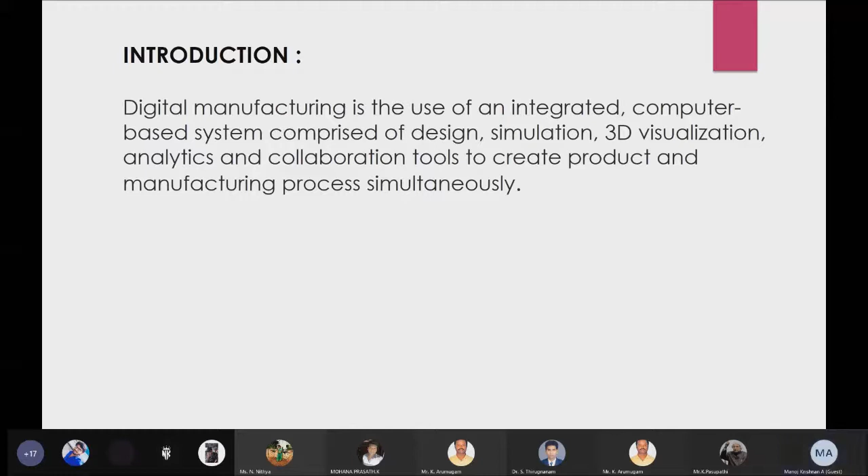The next thing is when we started using electricity for the manufacturing process. With the help of the welding process, instead of using gas welding, we moved to spot welding, which earlier used to be done with the help of manpower.

So the use of electricity is the industrial revolution 2. And the 3rd industrial revolution started when we started using PLC and IT systems. When the computer was integrated with the shop floor, most of the process will be automated.

For example, CNC machine. The CNC machine is nothing but an automated system that can be used for various purposes like part cutting, machining, and everything. So with the help of computer, when we started using it, it is the 3rd industrial revolution.

And the 4th industrial revolution comprises of the 3rd industrial revolution along with cloud computing. It uses cloud technology which collects all the data from the plant. For example, if there is any AGV, an automated guided vehicle in the plant, it collects the data from that. For a brief, I will show you the next slide.

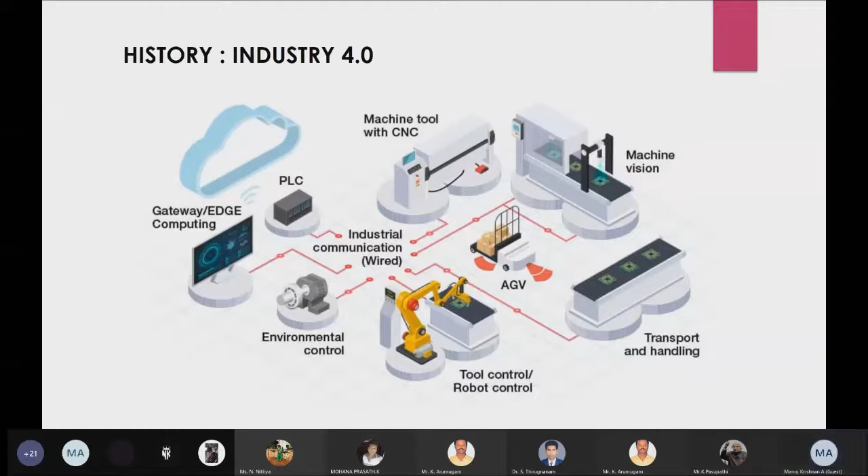Since I work in automotive, I will be explaining briefly about the automotive today. The automotive industry is nothing but a group of organizations which involves in designing, development, manufacturing, marketing, and selling of motor vehicles. The process of the automobile is what is called the end product of the automotive industry. It is one of the largest economic sectors in the world.

So if you take automotive industry in total, it comprises of various supplier companies. For a car to be built, you need to get supplied components from many manufacturers. If you take a car, there are so many components which we need for a car.

For example, we need tires, and we need engine components, we need even a small bolt and nut. Everything will be required because the OEM, which is called original equipment manufacturer - you could find companies like Honda, Toyota. They are called OEMs because they have a product by their name.

OEM cannot produce all the components, so what they will do is they will outsource all the components to the suppliers. Suppliers will be providing all the components to them, not all, but most of the components to them.

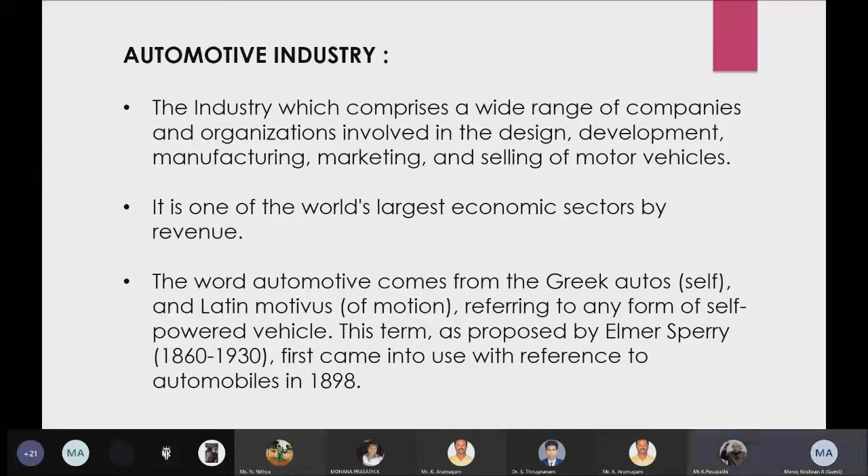Okay, and moving on to the next one. So now, how digital manufacturing is implemented in the automotive industry is, we are using digital manufacturing in various phases of the automotive industry. Here are some of the examples that you can see.

It is used in press shop. Press shop is nothing but, when you look at a car, we could find the door components and everything. Initially it will be a sheet metal, a plain sheet metal. So press shop is nothing but it will have different kinds of dies which stamp the sheet metal to provide a shape to the component.

Then afterwards comes the BIW assembly. Once the child component which we get from the press shop is moved on to the next one, it is used to assemble the BIW. BIW is nothing but body in white. I will tell it briefly in the upcoming slides.

And it is also used in paint shop and general assembly. General assembly is where the car's variant will be fitted.

If you look at cars, there are so many trims, meaning variants. For example, if you take a Swift, the variants are LXI, VXI, and ZXI. In the LXI, only some features are provided, and these feature lists are defined in the general assembly. So during manufacturing, in the assembly section, they define the car's variant and manufacture based on the specific variant.

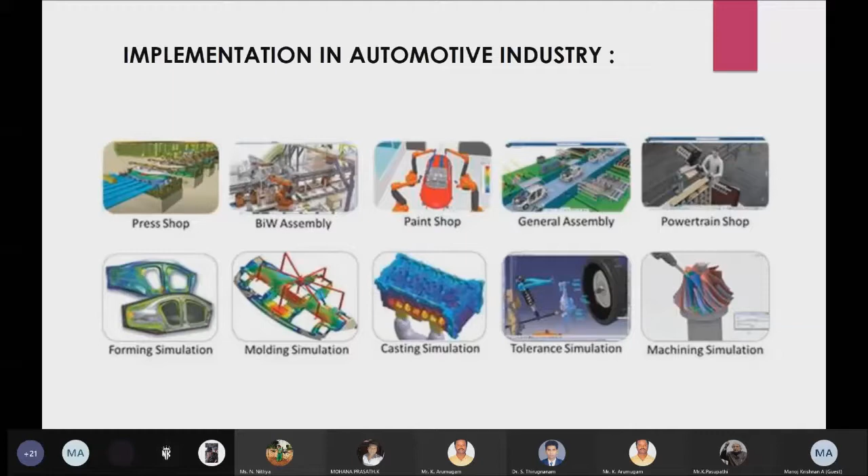Moving on to the next one, for machining simulation also, we are implementing this digital manufacturing. Any questions till now? No, sir. Okay.

I will be covering the topic of BIW assembly today. BIW is nothing but an untreated and unpainted sheet metal part.

Once the stamping simulation is completed, from the sheet metal, the dies will be producing child components. For example, you could find inside a door there are so many components. What you find in the real world is a finished component, but within the door there are child components, some used for latch areas and hinge areas, and there will be impact beams. These components are separately manufactured in the stamping simulation.

In the BIW simulation, we collect all the components together. For example, if you take the door, we get hinge components, latch components, and reinforcement components, everything from the customer end.

What we do is simulate the entire manufacturing line in the software itself. So before delivering it, we find all the issues we are facing and how the layout will be placed. Everything is done in the digital phase itself, which cuts down a lot of rework and a lot of cost.

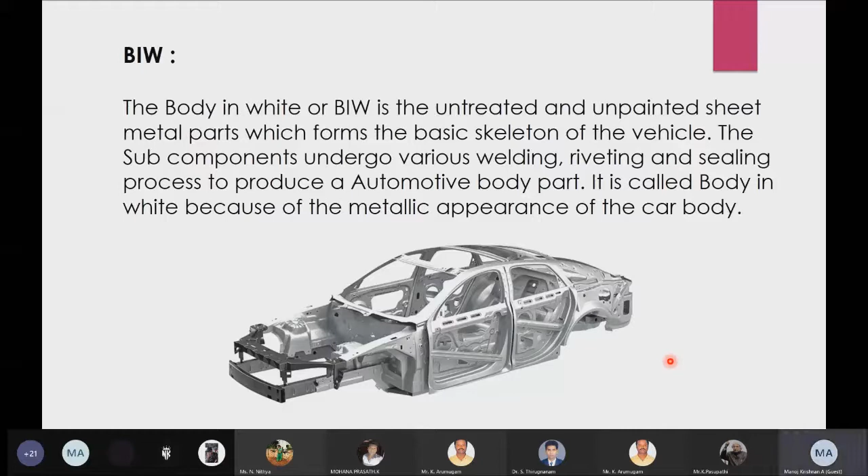These are the BIW components found in a modern day sedan. There are various types of car models, but today I'll focus on a sedan. This is the finished component of the sedan, which includes so many components like hood, door, and everything. These are called closure lines - the things used to contain, which move on the body in white and provide closure. So hood, door, and trunk lid are called closure lines.

Starting from the body, it mainly consists of two components: floor components and body main components. The floor component is divided into three sections. The first is the engine compartment, which holds the engine and comes at the front portion of the car. These components are designed based on crash tests studied by the product team.

Our process is to manufacture these components, and there is a separate team called...

Hello, can you hear me? Yes Manoj, sorry, there was a network break.

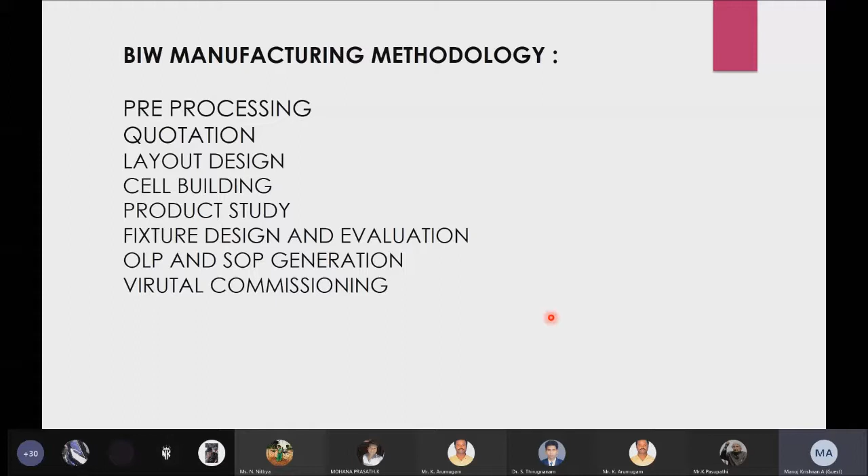So the first phase is pre-processing. Pre-processing is done in the OEM side. For example, if you take OEMs such as Maruti Suzuki, Ford, and everyone, before delivering the product to the customer and to begin the manufacturing phase, what they will do is they will study the component first.

They will study whether the product they are going to manufacture is feasible to manufacture or not. The product team will design a component based on the design. There will be a design team which provides sketches, and based on the sketches, the product team will develop the component, develop the car. Our manufacturing scope is to check whether the design provided by the product team is feasible to manufacture. They may provide some complicated structures, and from our manufacturing scope, we cannot manufacture such components.

So we will be checking everything before the product itself is started, before the stamping phase itself. What we will be doing is we will study the product data which is still in the maturing phase, and we will be working along with the product team, providing feedback to them on whether it is okay for manufacturing or not, and whether we need any changes in the car body itself.

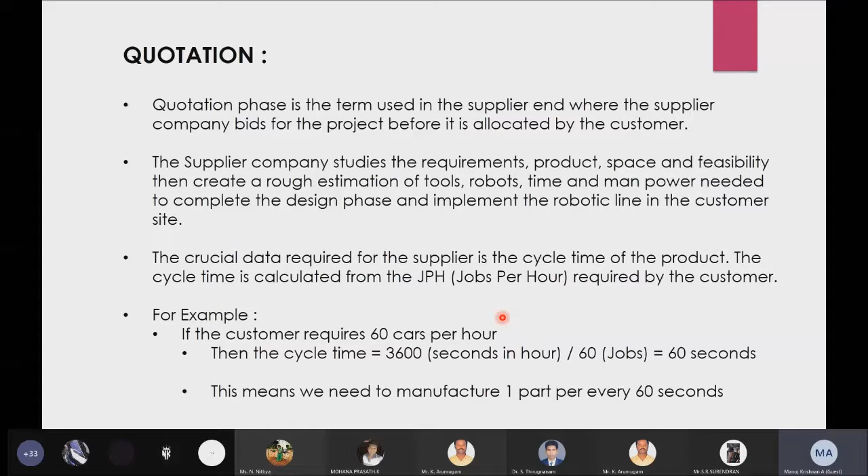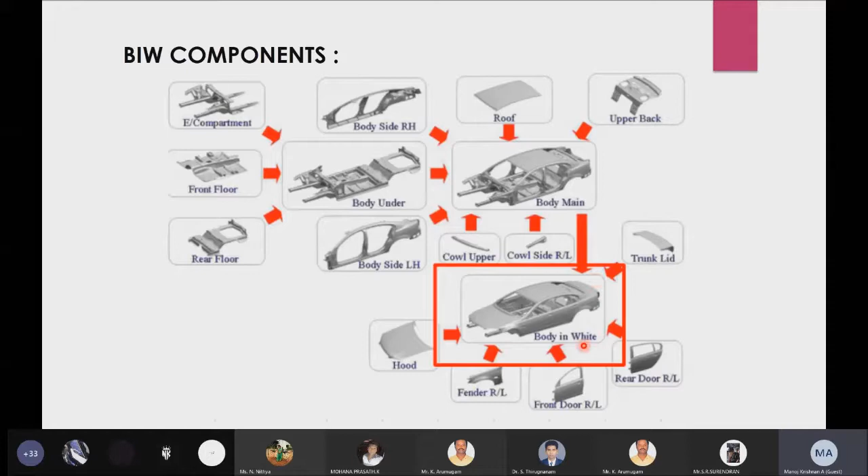If you look at the lines from the previous slide, we will be having each line for each component. For each 60 seconds, one component will be coming from here, one from here, one from the rear floor, and for each 60 seconds, one body under will be manufactured and welded. So for each station, it should achieve 60 seconds, so that when coming to the final stages, for each 60 seconds, one entire car will be coming out of the assembly line. This is what we determine from the quotation phase itself.

Moving on to the next one, we will be receiving the layout from the customer. For layout, in digital manufacturing, they use different kinds of software like AutoCAD, FactoryCAD, iCAD. Previously, they used to chart everything on A3 or other sheets, but now since we have moved to digital phases, they use 2D software.

The supplier end will go directly to the customer side and mark the space provided by the customer for the manufacturing line, and based on that they will provide a rough sketch. They will come to the company and discuss with the pre-processing team, and all the design and simulation teams will discuss, and based on that they create a rough sketch of how the layout will look. Based on the processes, everything will be selected, and they will present it to the customer during the quotation phase itself. The draft layout, once okayed by the customer based on the process, will be provided to the simulation end also.

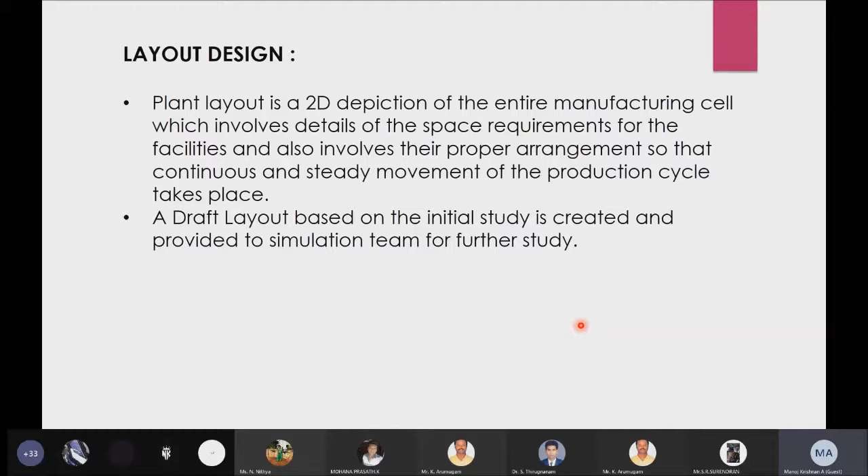The layout is mainly needed during the implementation phase. Once all the digital phase is over, we will provide it to the plant team, and the plant team will mark everything in the plant, and based on it they will place the robots, fixtures, and everything. The software used mainly for layout design is FactoryCAD, iCAD, AutoCAD, but majorly they will use AutoCAD for these kinds of operations.

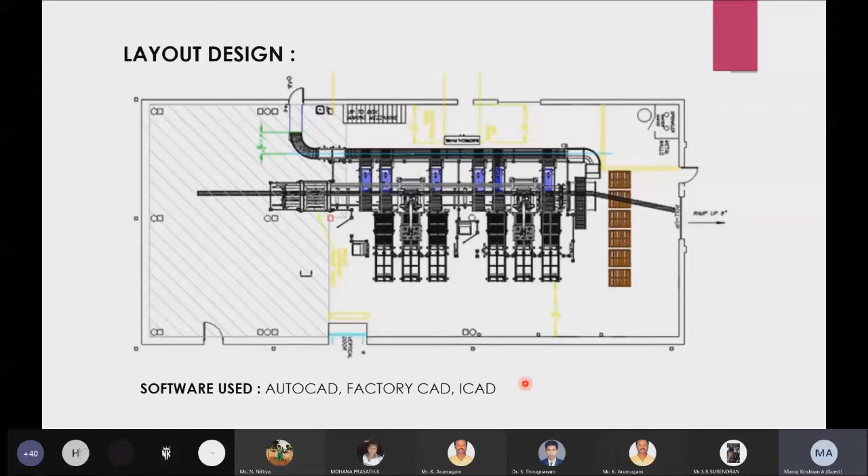So the next phase will be cell building. Since I will be talking mainly about simulation, I will start telling about cell building, because simulation works in tandem with all teams.

This will work along with the die team. The die team is used in the closure lines to manufacture the pressings and everything, and it works along with the layout team and the design team also. So the simulation team works based on the output of each team. The fixture output which we receive from the fixture team is the input for the simulation, and the layout is the input, and so on.

So the cell building is a phase which uses simulation software. We use various kinds of software like Process Simulate, RobCAD, Delmia. These are called simulation softwares, and in them we'll be using various components like layout, robots, guns - if you are going for welding, we call that a welding gun, or if you are going for sealing process, it is called a sealer gun.

And after that, grippers. A gripper is a component used to move a part from one station to the other station. So the robot, with the help of grippers, will hold the component and move it from one station to another.

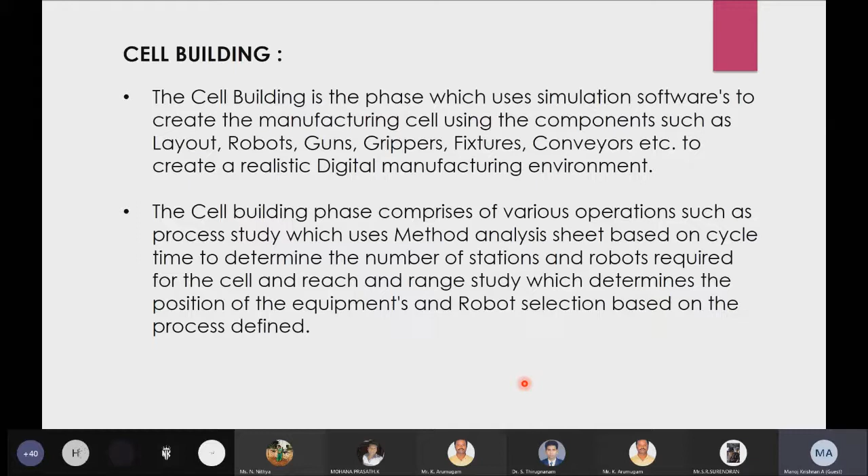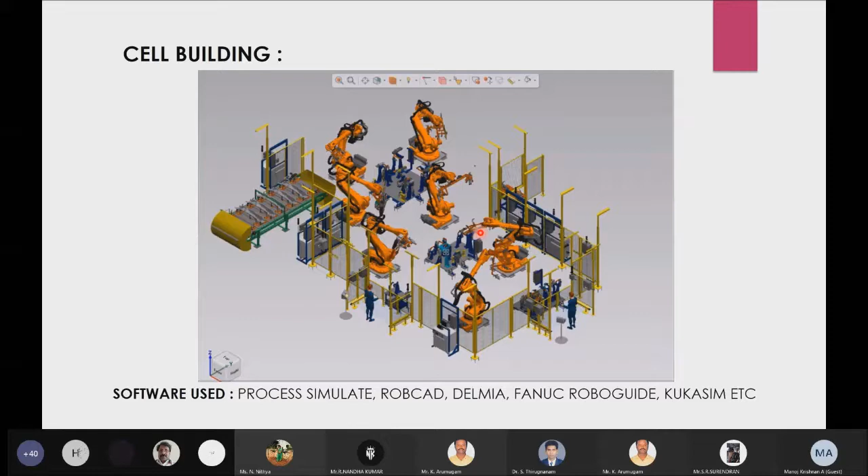So this is also one more image for your reference. So you could find here we have two loading stations, and after that a robot will be picking it from here, and it does operations here, and this robot has a gripper here. So this robot either drops here, and after the finished component is done, it picks the part and drops it here. And here we have one more robot which does the welding operation.

So you could find this is how we will recreate everything. This cell building needs inputs from all the teams. We will be using Process Simulate and RobCAD softwares, and to do this we will get a rough draft from the layout team, and based on the rough draft we will push everything, and based on our reach and range study, we will be altering the layout.

Once after altering, we will provide the data back to the layout team, and the layout team will provide us the final layout. You could find the cable tray, like you could see there is a black component running at the bottom of the cell, right? This is called a cable tray. These things will be determined by the layout team, and you could find these are called fixtures.

So when the operator is loading here, the component should not fall from the environment. So the thing which is used to hold the components in place during the operations or its movement is called a fixture. You could find this is also a fixture. So these are some of the reference images you could find.

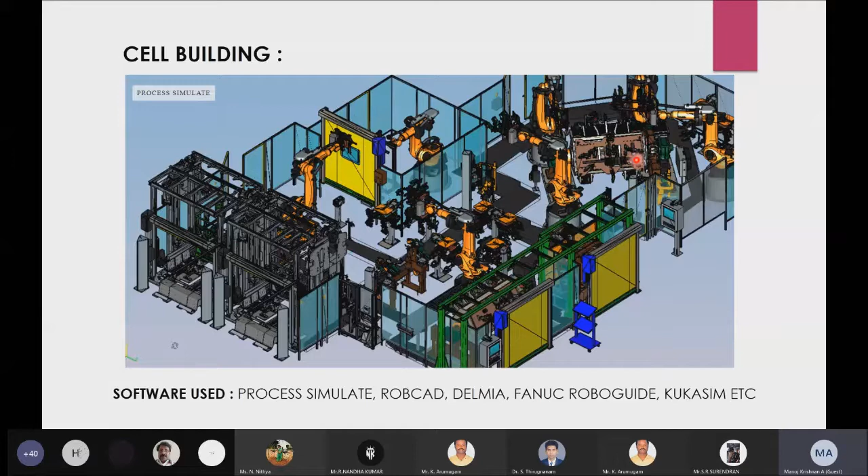So next we will be moving on to the product study. Once the initial reach and range study is completed, we will study the product of the component. We will be receiving the product from the customer end. So what we will do is we will study the component from the child component end itself, and study the step-by-step process of how the component should be made.

For example, in case of a door, initially we will be getting latch, hinge, reinforcement components and everything. So what we do in digital manufacturing is we study the entire component and how many spots it needs to be welded, and we select the guns based on it, because each car will have a different shape, and based on it we need to modify all the guns and everything, and we select all the spots based on the cycle time.

So as I said before, the manufacturing line mainly depends on the cycle time. So for each 60 seconds, some components need to be manufactured. Means we will be calculating how many spots can be welded for one cycle. So if the spots are exceeding that cycle, we will be adding one more station to complete the spot count.

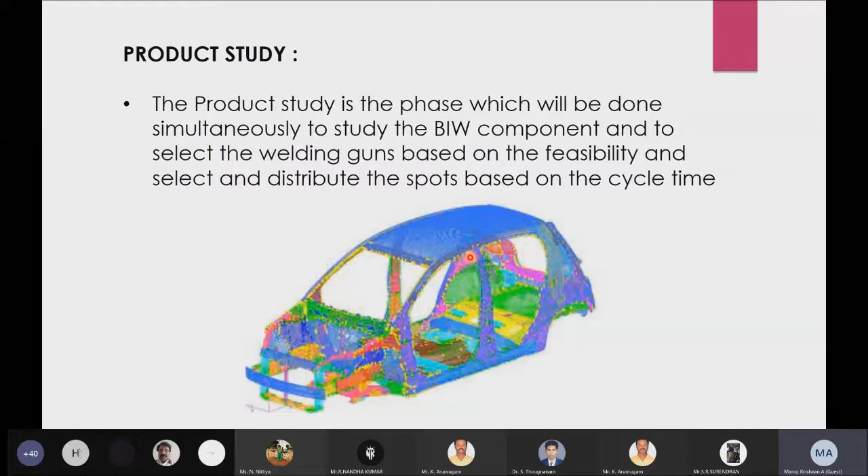So what we will be doing is, in the first station, only these two components will be welded, and once after these two components are welded, it will be moving to the second station, and in the second station only we will be adding the impact beams. So this is the process study which we will be doing in the initial phases.

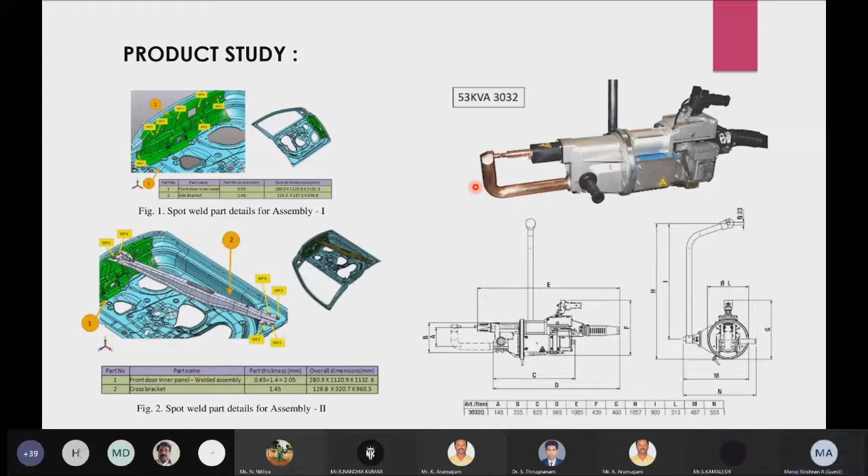So as you can see, there is a child component here, and we will be placing all the guns in the component. The main thing we will consider is that the gun body should not hit the component during the manufacturing phases.

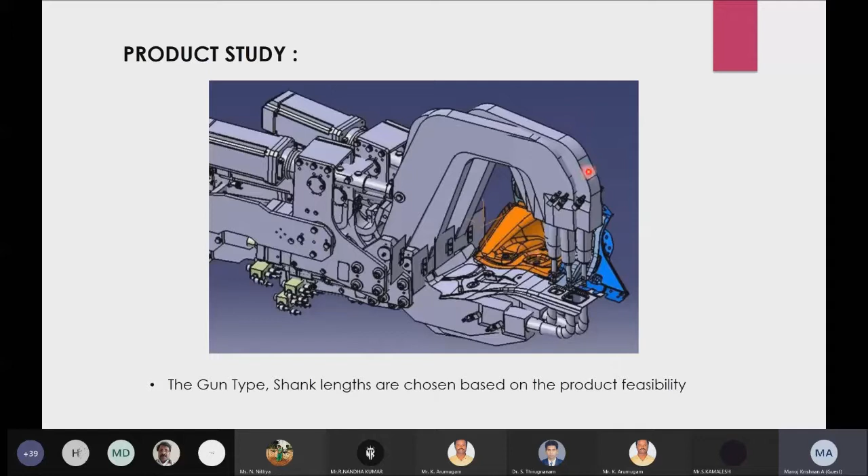Moving on to the next one, this is how the simulation will look like. So this is how the gun study will look like.

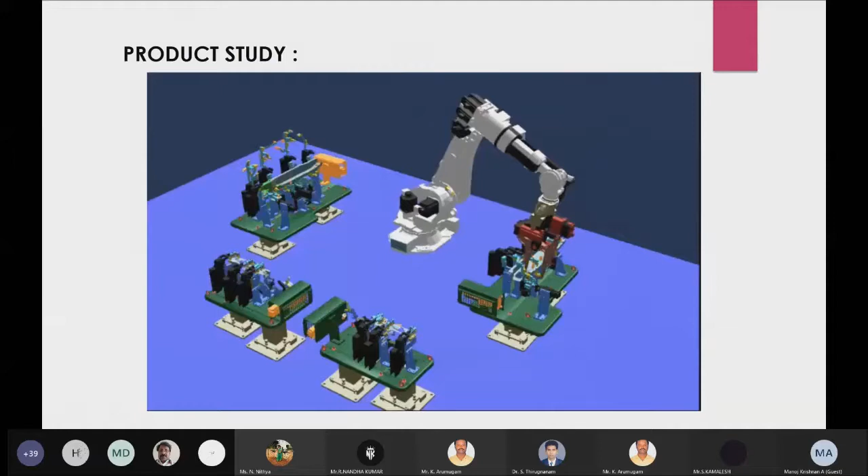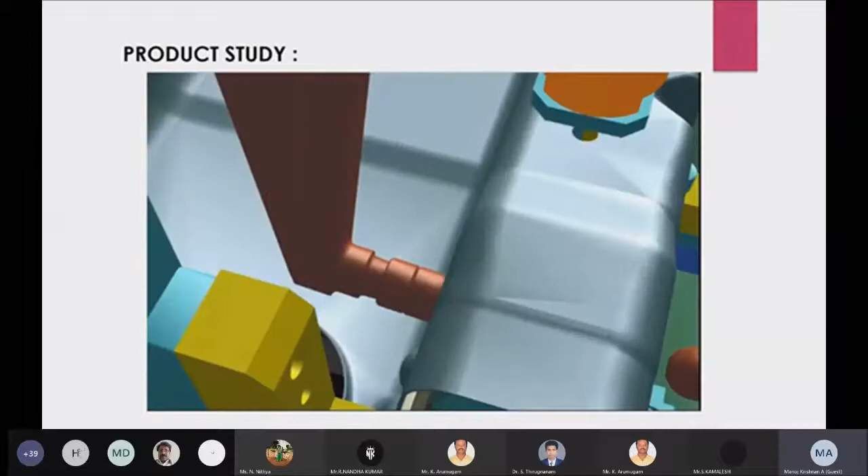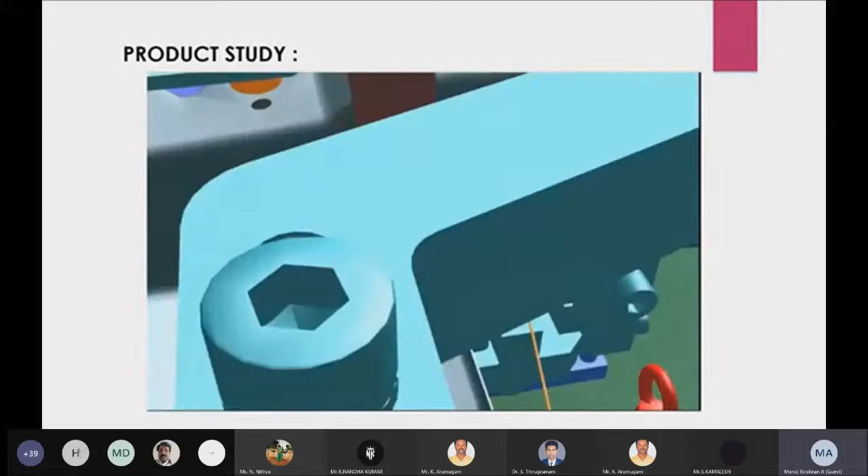So here you can see we are having a gun and a robot, and here we will be checking whether the gun is feasible or not. We'll be checking whether the gun is feasible with the component, or whether it is colliding with the component or with the fixtures. Based on this, the gun selection will be done. So this is how the product study will be done in the simulation phase itself.

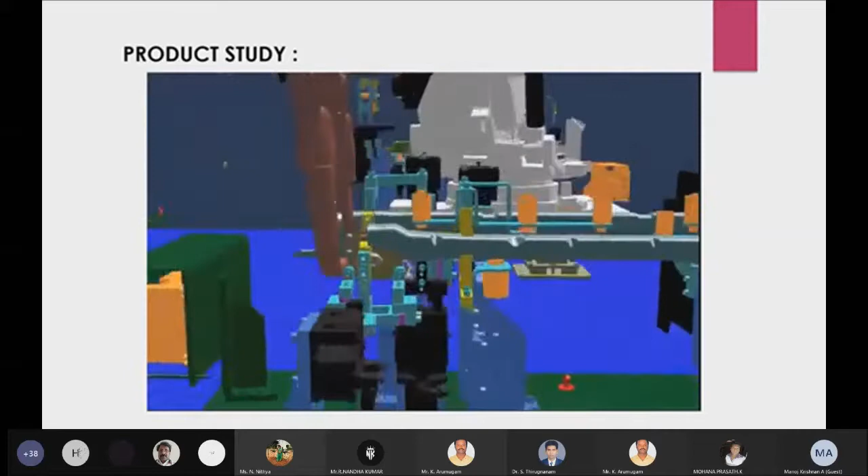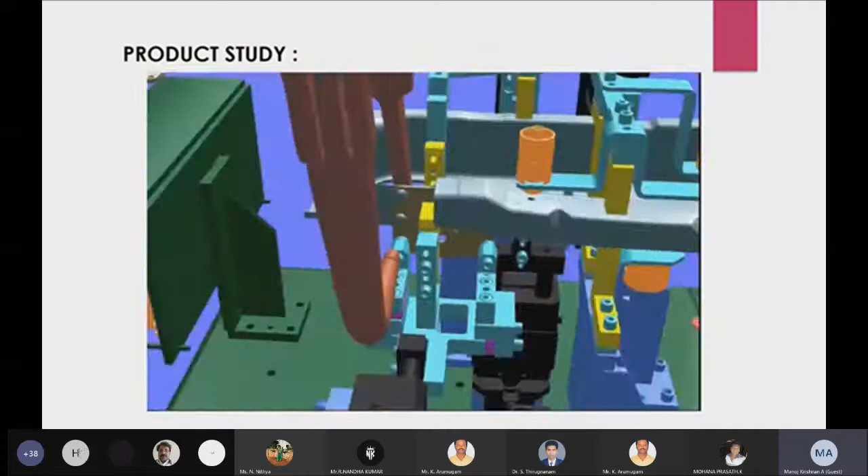We will be checking for all the clearances of the gun and everything in the design phase, so that before ordering the gun, we will have clear information on whether the gun will suit our process or our product. So this is how the product study will be done.

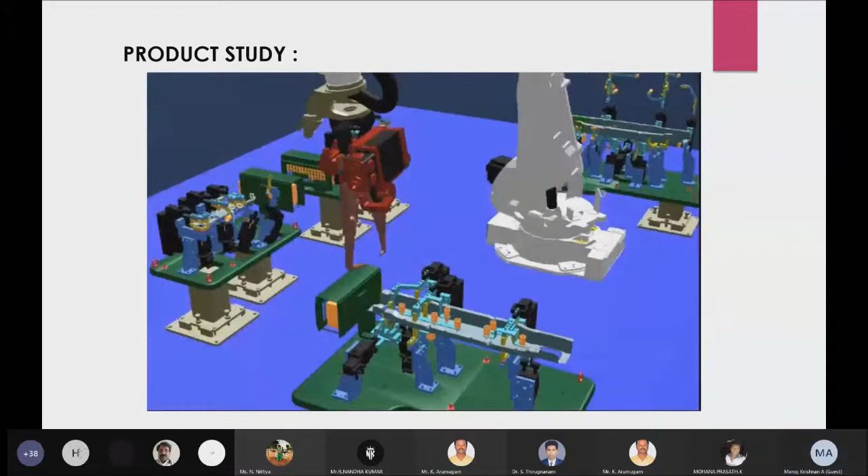Moving on to the next phase, this is the fixture design. As I told you before, we will be collaboratively working with the fixture and the layout team. In the fixture team, you could see the fixture is nothing but a support or holding device which holds the part during its operation.

As you have seen before, during the welding operations, the component was being held by one unit that is called a fixture. The fixture is used in both manual and automatic processes.

As I said before, it is used to hold the child components or finished components, and it will arrest them geometrically, so it will not allow the component to move in the X, Y, or Z direction. It will arrest in all three axes, with the help of pins, clamps, locators, and everything.

In the simulation phase, we will get the input from the fixture team, and we will be checking for the gun approach, as you have seen before, to provide easy access for the robots to access the spots, which helps in reducing the cycle time, and to check for any collisions during the movement between the gun and fixtures. We will be evaluating everything in the digital phase itself.

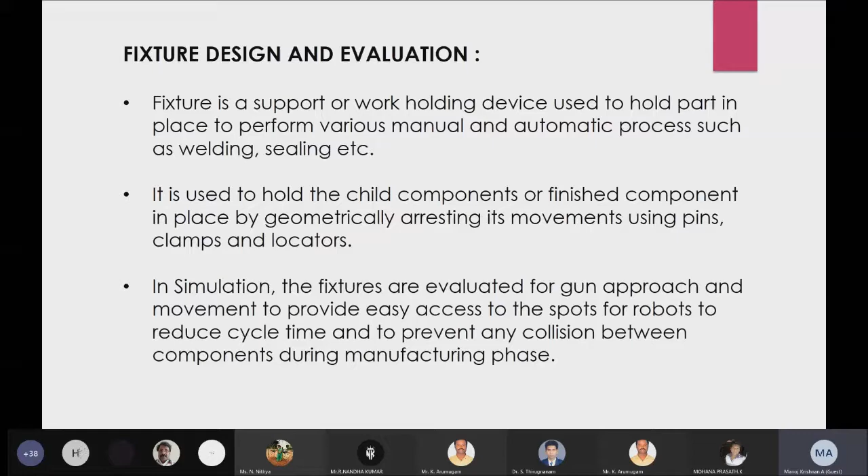There are majorly three types of fixtures we'll be using. One is geo fixtures. Geo fixtures are where all the child components are not welded. Previously, most geo fixtures were operator loaded ones.

The other type of fixture is called pallets. A pallet is mainly used in conveyors, so it doesn't have any clamps or moving parts. A pallet is nothing but a fixed component which allows the movement of the part in the line.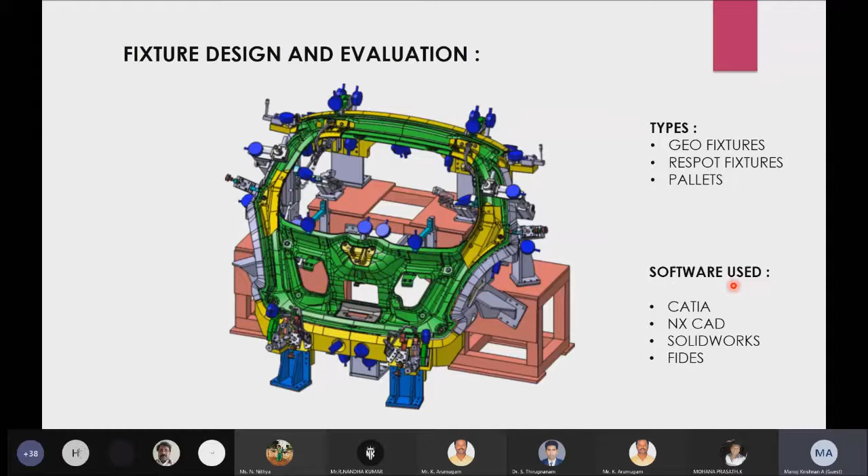Once after the fixture evaluation, layout, and design is done, we will create offline programming for the robots. We will simulate the entire manufacturing process, in which the robot moves to the fixture, starts the operations, and comes out. After that, the clamps open, and another robot will pick and drop the part in the process. So we simulate everything in the digital phase itself.

While doing this, we have to provide programs to the robot. These programs are simulations for the robots. We have various suppliers for the robots, manufactured by companies such as Fanuc, Kawasaki, ABB, KUKA. These are the robot manufacturers, and every manufacturer provides a data file.

We simulate everything in the design phase itself, and with the help of those robot manufacturers, we download the programs. Those downloaded programs are used in manufacturing and provided to the line once implemented. After implementing everything, we provide the program to them, they plug it into the robot, and they recreate the simulation we did in the digital phase in the real-time phase. That is called offline programming.

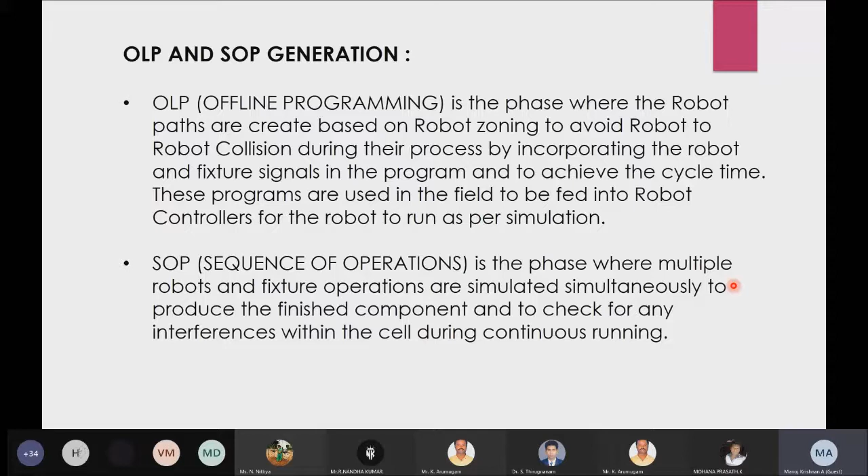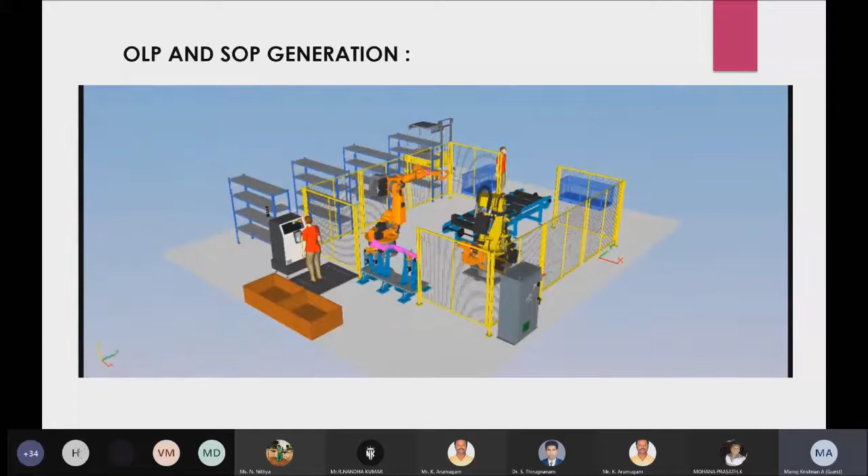This is a demo of how the sequence is done. As you can see, there's also a human simulation. The human is simulated to pick and drop the part, loading the component at the geo station. Then he goes to the PLC and presses the palm button. This is what you call the clamps, the orange component that closes the part, done before welding begins.

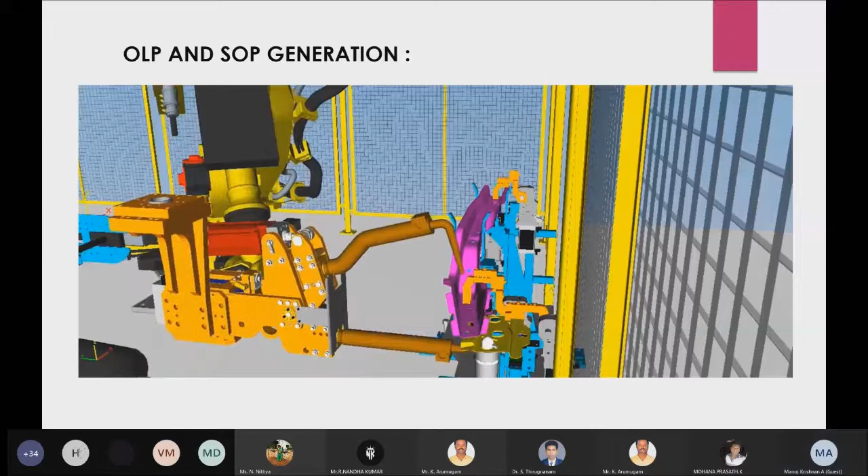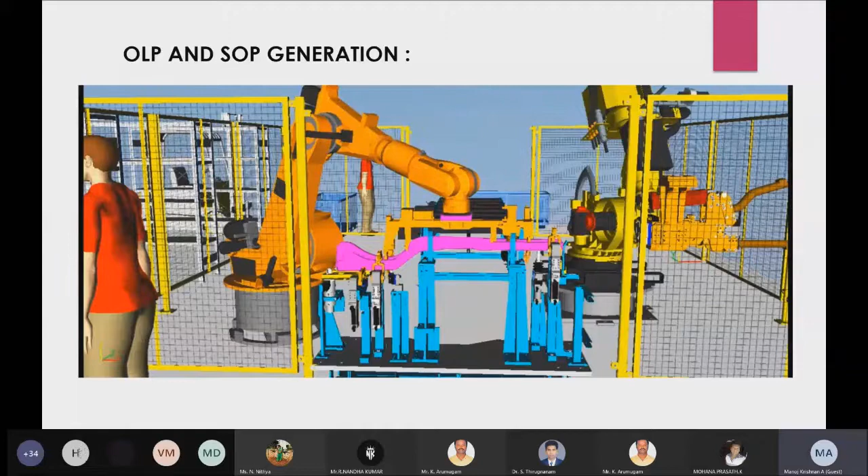After that, the robot moves to welding and performs the welding operation. This is called the gripper component, and you can see there are clamps in the gripper. It picks the clamped part and the fixture clamps open, then drops it onto the conveyor. Once the finished component is done, the operator picks the part and places it on the part stand.

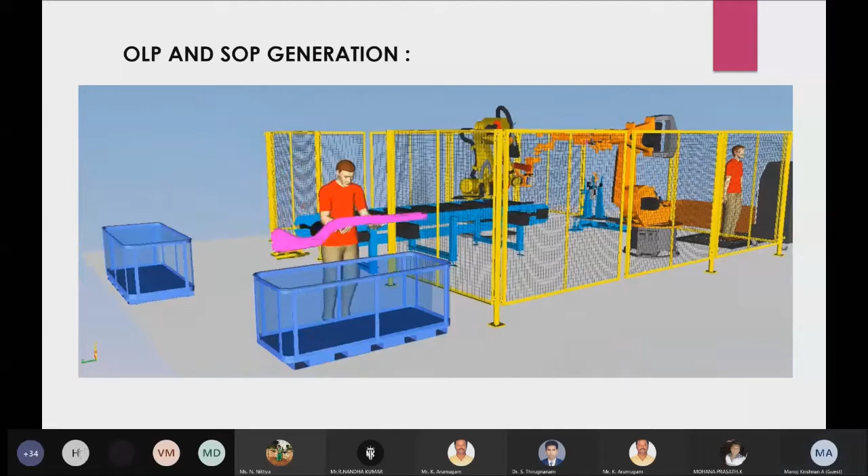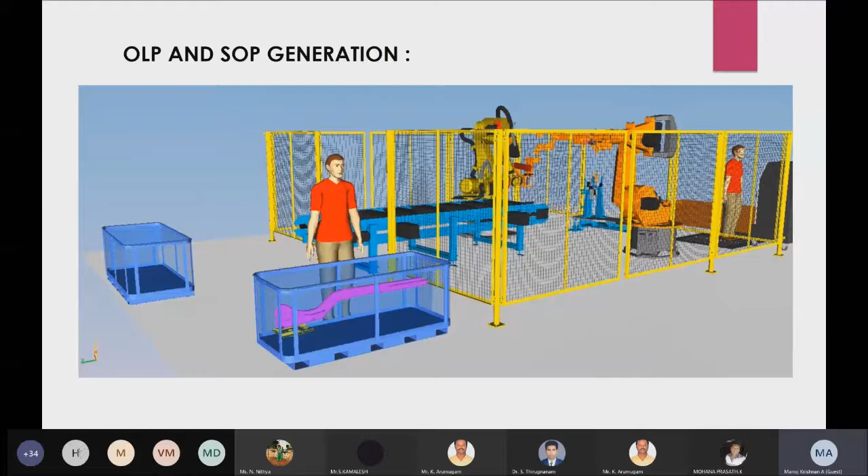The robot movement is done using OLP, and all the other human operations and conveyor movement are done using the SOP. This is what we do in the simulation during the digital manufacturing phase, recreating the entire manufacturing process to avoid issues. This way, we can confirm these robots will not collide, and determine how much time the operator takes to complete the process. All these phases are done in the digital phase itself.

Then this is the new phase we are undergoing, the new innovation we are working on, called virtual commissioning. As you've seen before, we simulated the operator movement, like pressing the palm button and everything.

Virtual commissioning is nothing but once the simulation phase is done, we will be implementing in the plant condition. We will be placing all the components in the floor. Then after that, what we will do is we will communicate with the PLC.

PLC is nothing but a programmable logic controller which uses ladder logic and other logics to determine the process. For example, if the operator fails to load the component, the robot should not come and pick the component, because it uses various sensors to determine whether the component is present in the fixture or not. And once the welding is being done, we will be having sensors to determine whether all the welding is completed or not. So all this information will be handled in the plant condition.

So currently the innovation going on is we are using various 3D technologies to simulate the entire manufacturing plant from the debugging stage itself. The phase which comes after the implementation is called debugging. So we will be providing the robot programs and everything.

In the digital phase, in the plant phase, what they will do is communicate the robot with the PLC. They will be receiving the signals from the robot and checking whether the signal is okay, and after that they will push to the next step. So all these things will be done in the virtual commissioning phase itself, where we will be implementing all the PLC logics and the HMI.

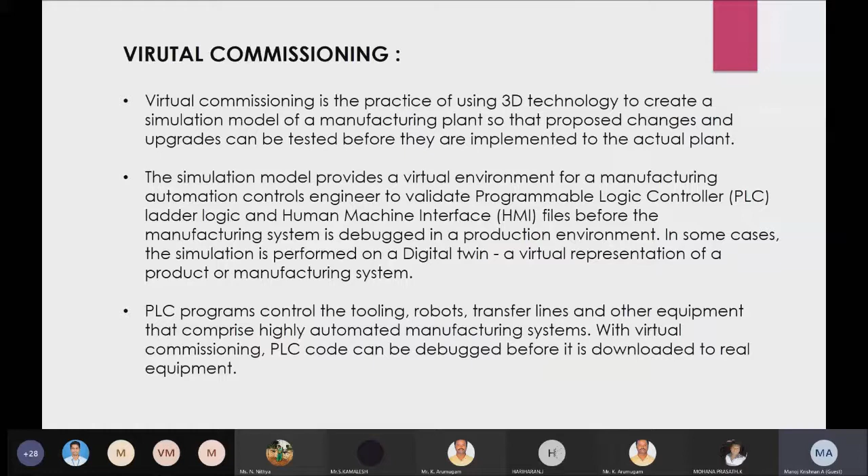So now we are trying to recreate everything in the virtual commissioning. This is what the current innovation is going towards. And this is a sample of how this PLC is working.

You could find here the robot is at home. This is what a sample HMI box will look like. You could find the robot is at home condition, and here you can see the light sensors.

There will be various light sensors which will be placed, and when the part approaches the endpoint, we will receive a signal indicating the part has approached. Then the robot will be moving, doing the welding operations, and it will be placed in the next conveyor.

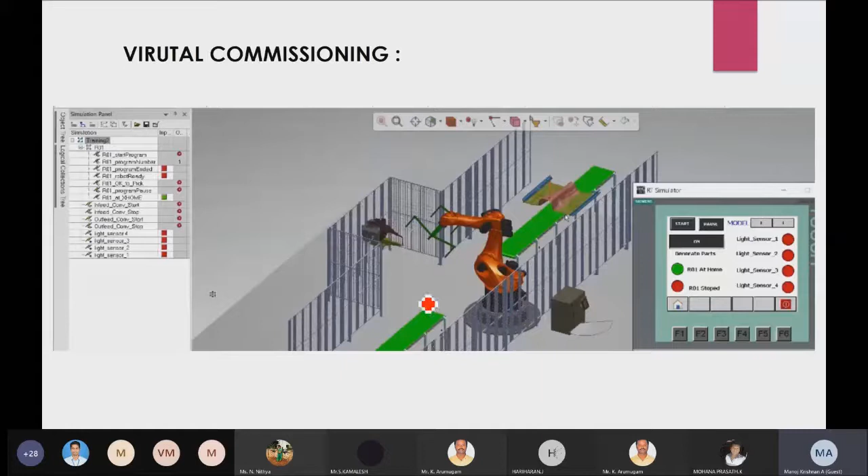You could find in the HMI box, for each step, how the process will be displayed. Once reaching, you could find the light sensor is enabled, which shows the part is present in that position, and the robot-at-home indicator is turned off.

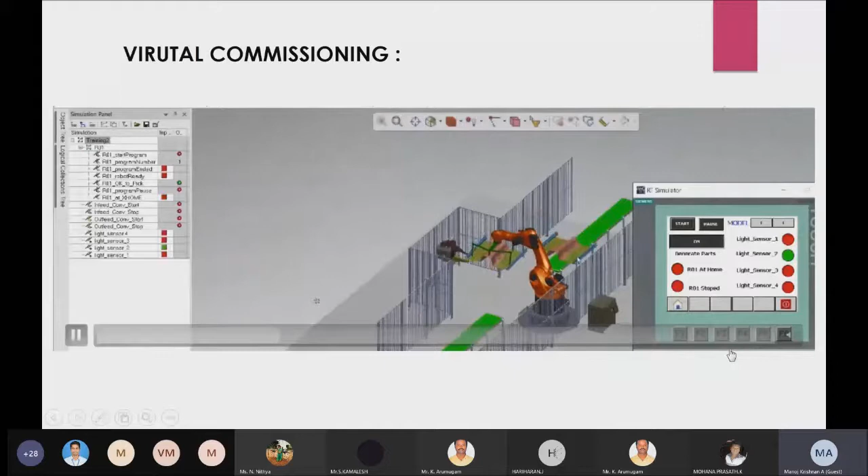Now during the welding operation, the next component arrived. This light sensor checks for the part presence and provides the operator information that a part has arrived at this location. All this information will be shown in the HMI box.

So the operator can control the entire cell using this HMI box. He can start the operation, pause the operation, and turn the entire cell on and off using this HMI box. So everything will be done here itself.

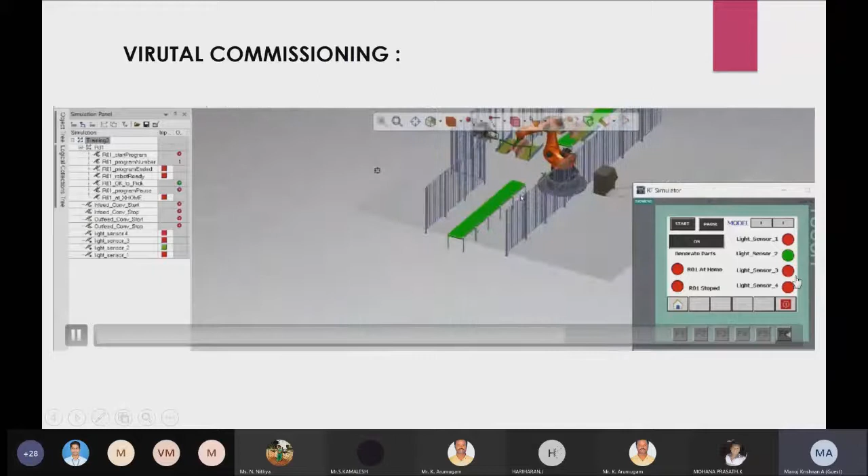So after dropping, you could find another light sensor being turned on. Once it moves to the other position, you can see the operator turning off the cell. But since the operation already started, it will keep running. So what we can do is pause the cell to stop the robot. And while stopping, you could find the robot-stopped signal is also turned on. So this is what virtual commissioning will look like.

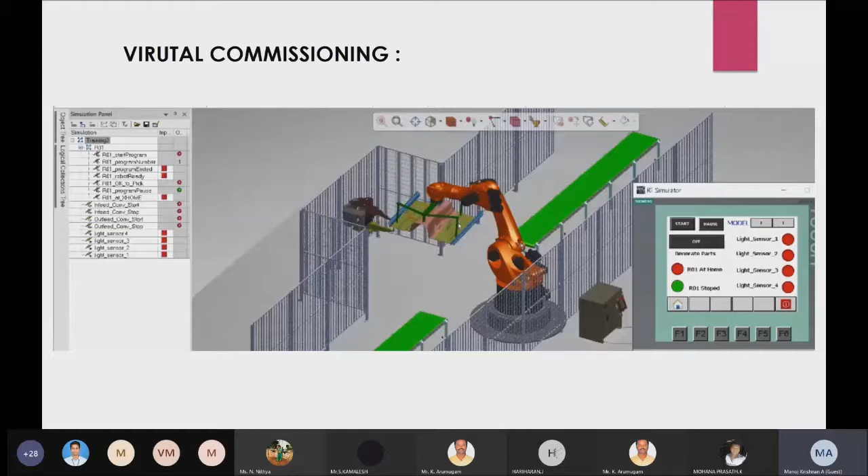We'll be controlling all the operations in the digital phase itself before implementing, so even debugging can be done. On the left, you could find the signals chart, showing what signals we are receiving here. So everything will be done here.

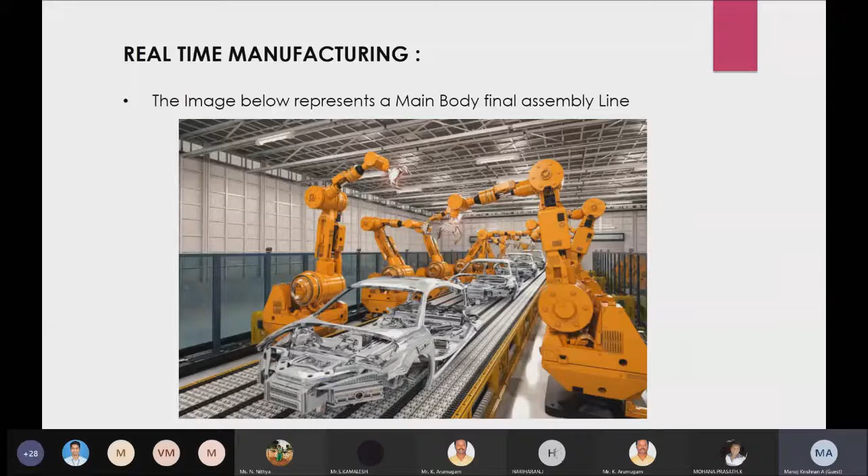So this is what a real-time manufacturing cell will look like after the simulation phase. Once the layout, fixture, and everything is deployed to the plant team, they will be assembling all the robots and cars. Here the picture represents the main body line, in which the car's main body will be moving in a shuttle, and we'll be having numerous robots to do the welding operations and everything.

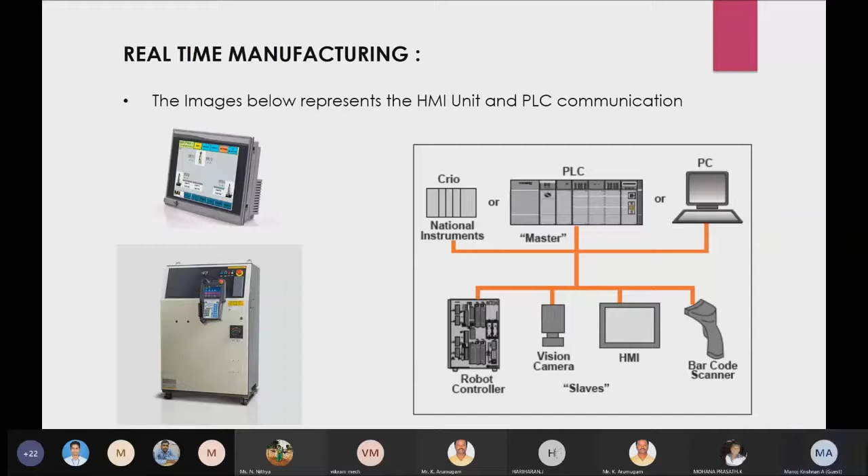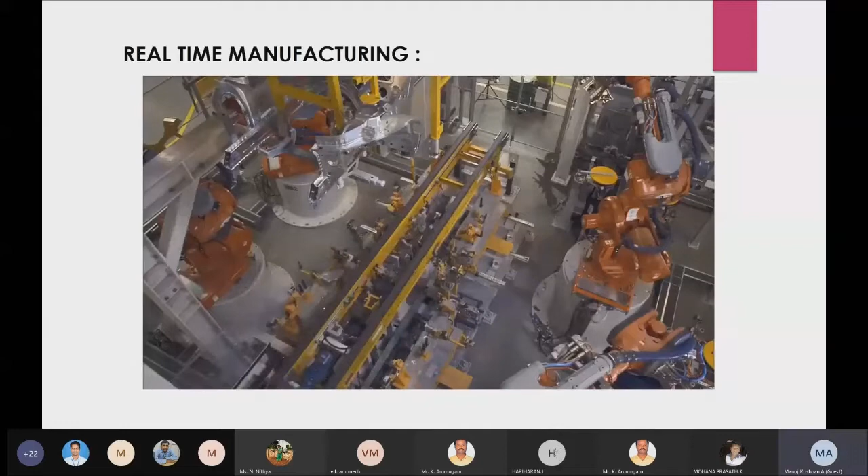So this is an example of how the real-time manufacturing I explained will look like. You can see this is the underbody line, and this is how a shuttle in the plant will look like. This is a gripper robot picking the underbody of the car and moving the part along.

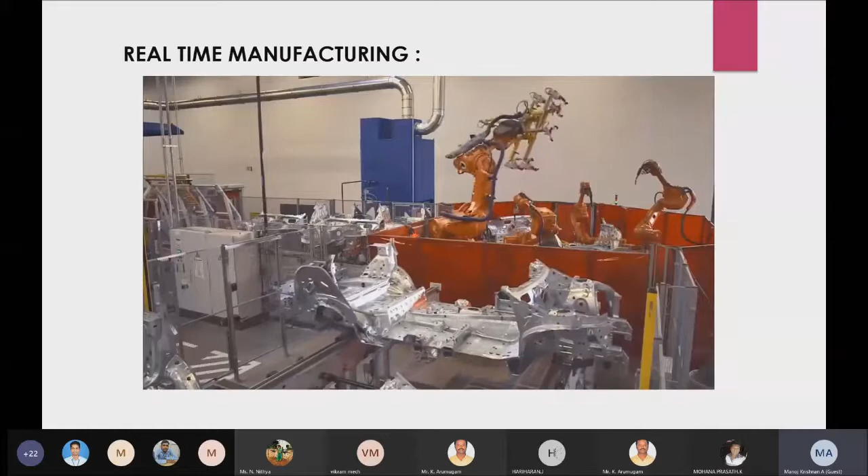So what we'll be doing in the digital phase is simulating everything there to avoid rework. You could find the robot cost and fixture cost, everything. The cost of rework is so high in the manufacturing sector, so digital manufacturing plays a key role in reducing all these costs.

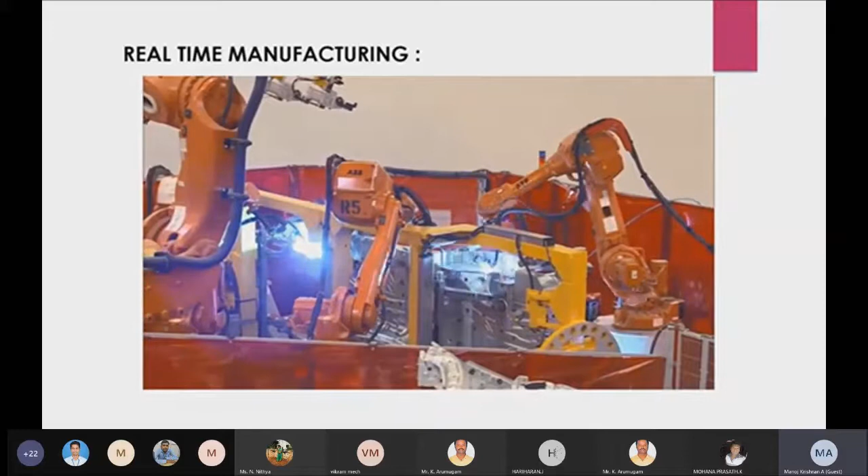So here they are doing the arc welding process.

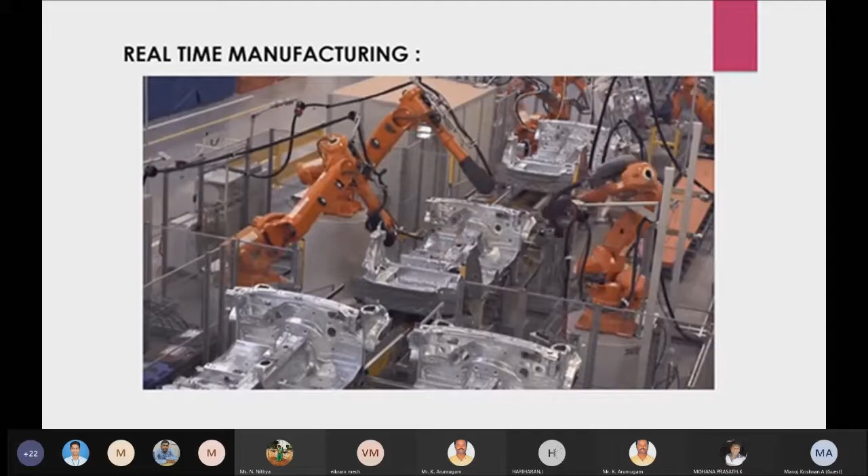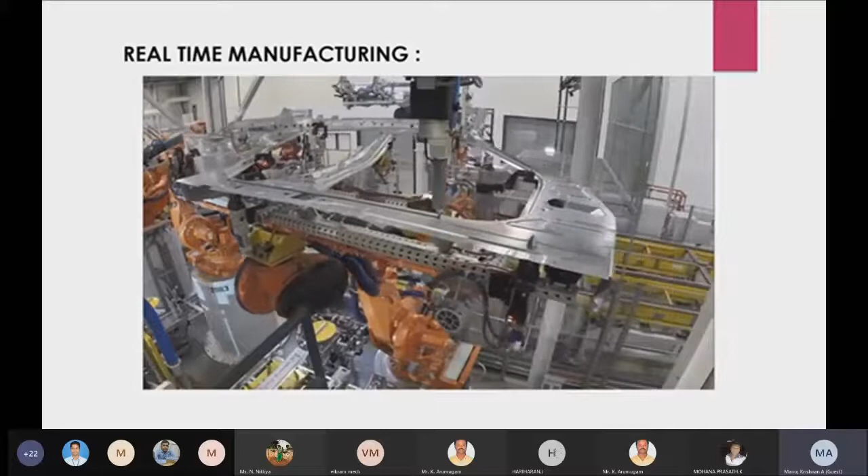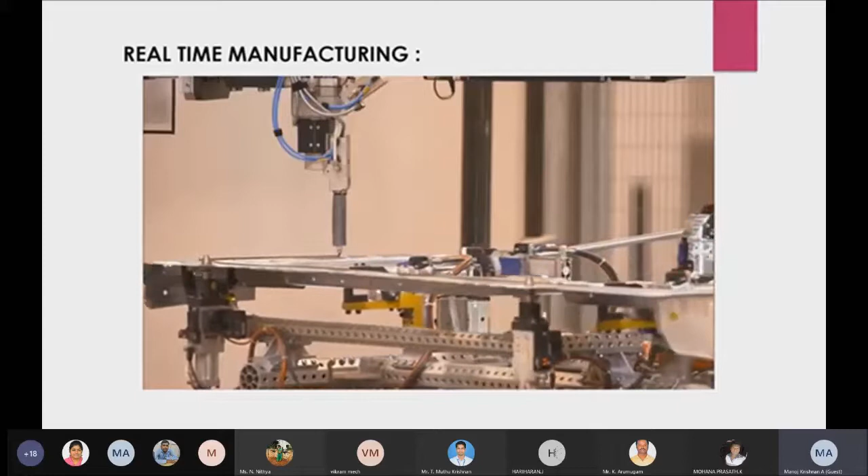So this is what I mentioned about the sealing process. You could find a robot applying glue to the body side. What it will do is merge the body side to the underbody, so it should have a strong adhesive to the underbody. After sealing, the side body will come and marry with the underbody. It provides a strong adhesive to that, and also provides dampening, giving a cushion to reduce vibrations and everything.

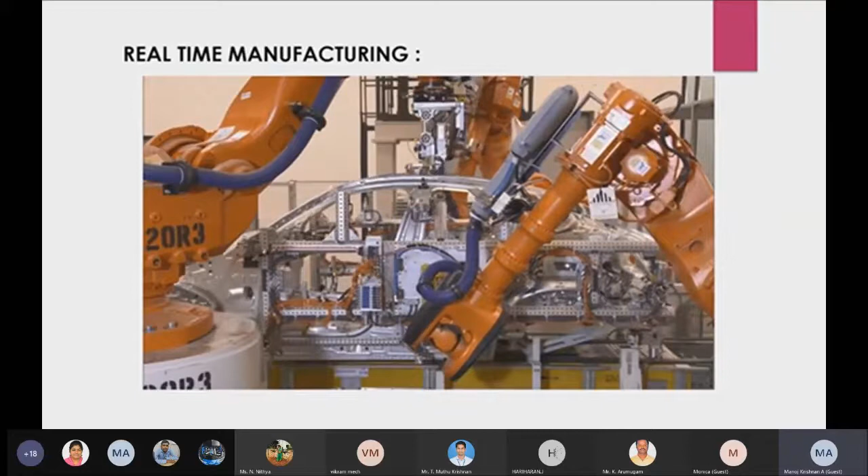After the side body, you could find the roof reinforcements are placed, and after that the welding is done for the body main.

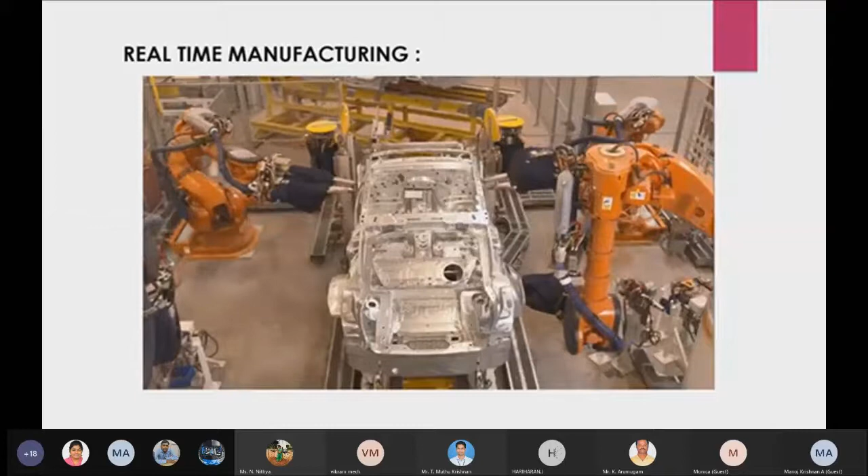So this is how spot welding will look like. We'll be having different guns, and then it will do the welding.

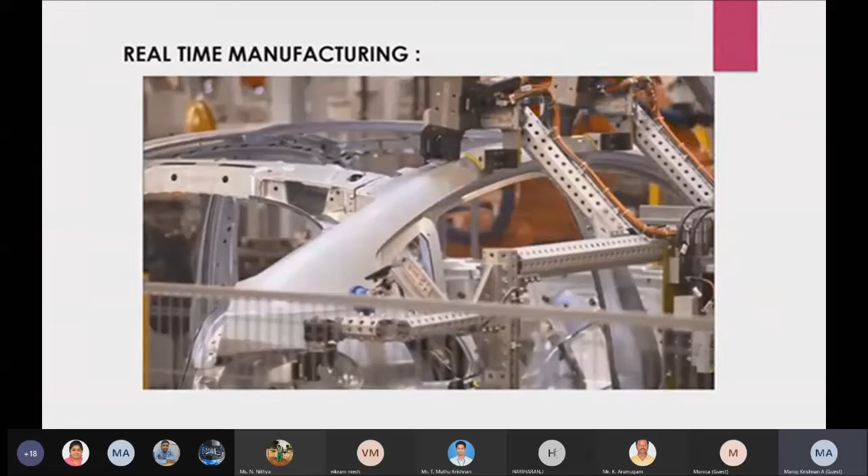So as you can see, this is how the grippers will actually work. After placing it here, the clamps open. Everything will be automated in the automotive field, and these sequences are provided by the PLC controller. Once reaching here, the robot will send a signal to the PLC that it has reached, and the PLC will send a signal to the grippers to open the clamp. So that is what a PLC does.

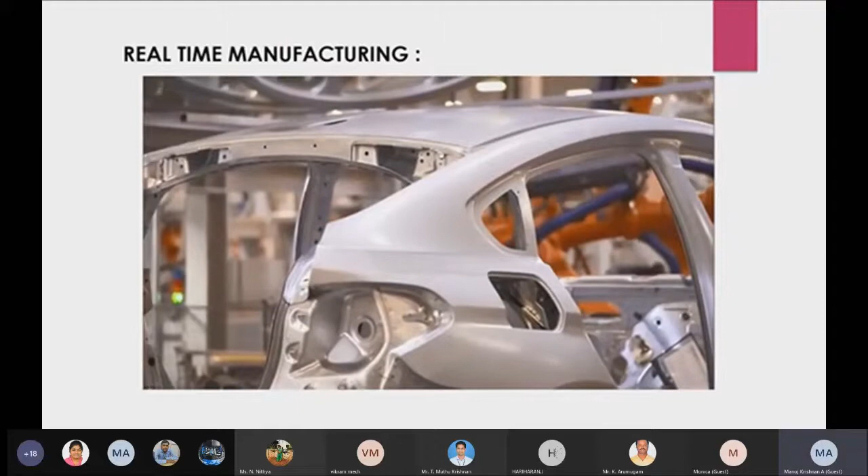Once after it is placed, the PLC will receive a signal that the component is placed, and the PLC will send a signal to the conveyor to move the component. Once the finished component is done, the robot will be placed in the line which will proceed to the paint simulation.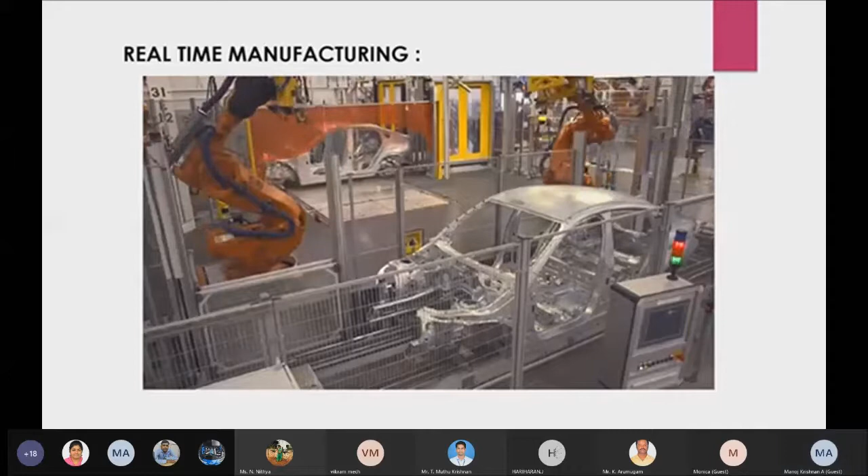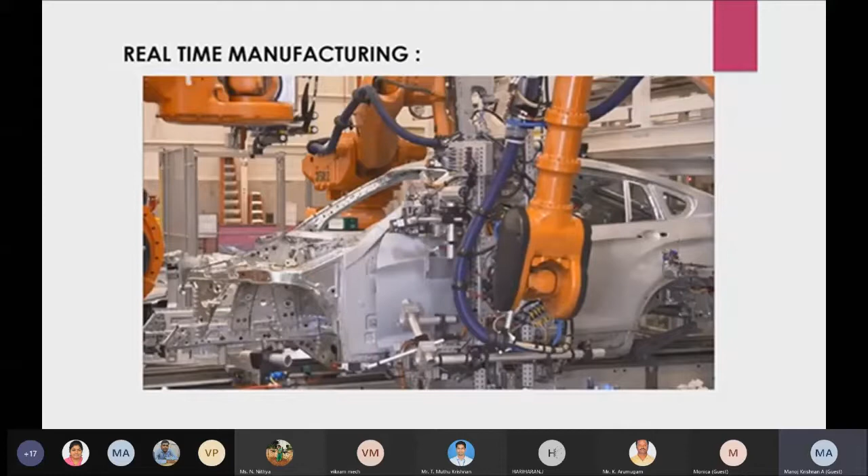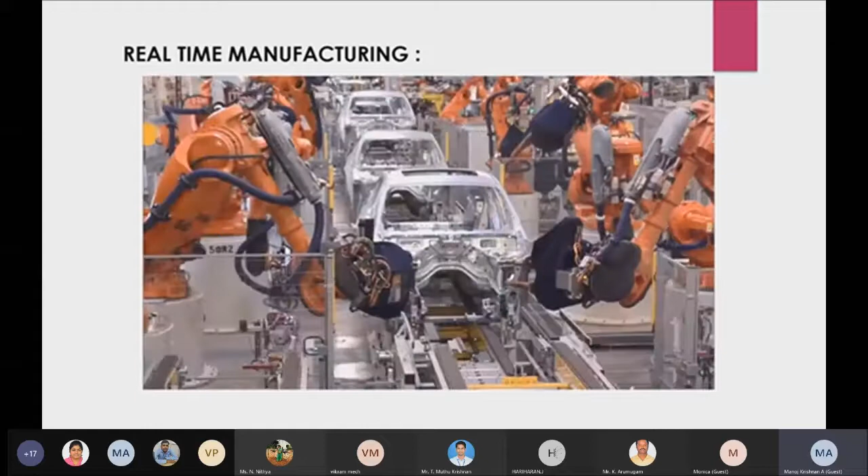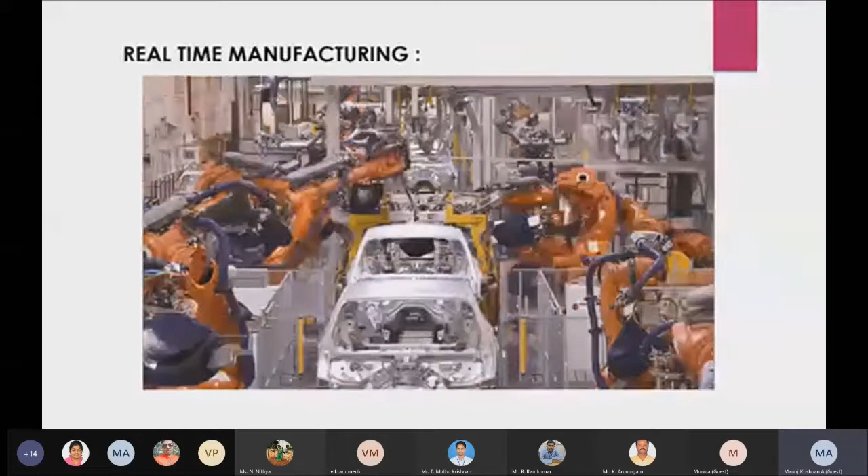So after the body in white is completed, all the closures will be attached to the body. The closures are the closing parts, like the hood, tailgate, and doors - those are called closures. The robots you see here are called industrial robots. There are many robots used in the medical field too, but for manufacturing industry they use industrial robots, and the robot currently shown in the video is an ABB robot.

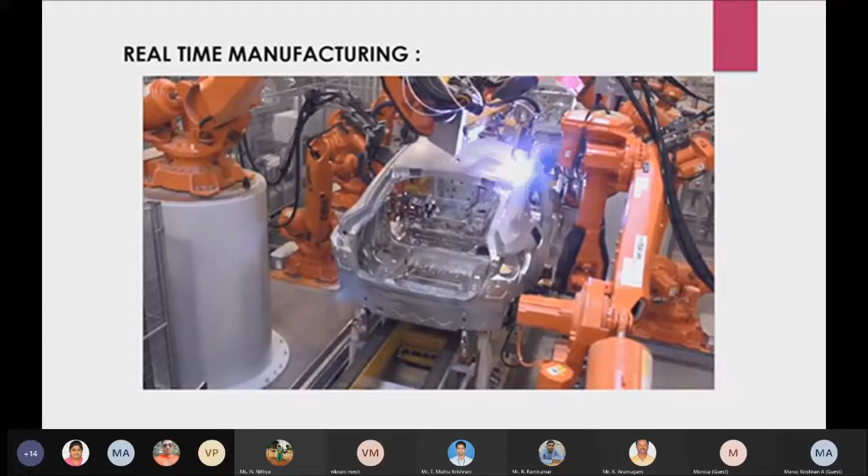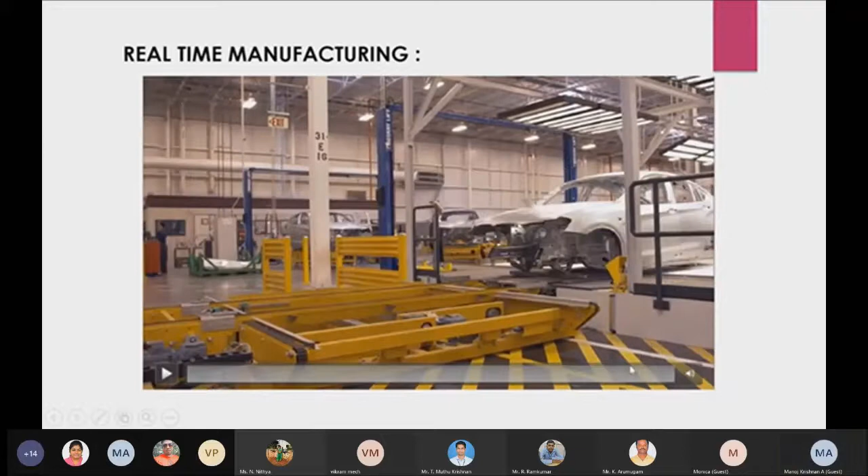So after everything is done, the final component will be completed. As we have seen before, there are various stations in this line, and each station runs based on the cycle time only. For each 60 seconds, the car will move to the next station. That is how we define the process.

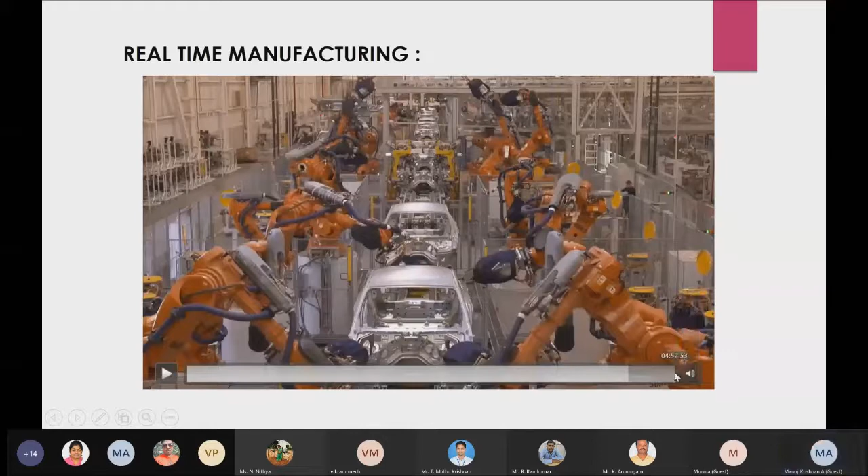After that, it will move on to paint. One of the benefits of digital manufacturing is we can rapidly deploy, because if there are any changes, we could simulate everything in the digital phase itself, which helps us save a lot of time. This helps in ramping up the production line. The next benefit is expenditure - since we don't have major reworks, as all reworks are validated in the digital phase, the cost is very low, and there is increase in flexibility.

Even if the design is not feasible and we need to remodel it, using digital manufacturing makes reworking easy since we won't be manufacturing the component every time we need to change it. Quality is also improved, because before digital manufacturing, we would directly manufacture the component based on 2D drawings, and only in the plant condition would we check these processes, leading to a lot of collisions.

So in the digital manufacturing phase, it helps us improve the overall quality of the fixtures and designs. The limitation is, since everything is automated nowadays and done using cloud computing, there is a risk of data security and data loss.

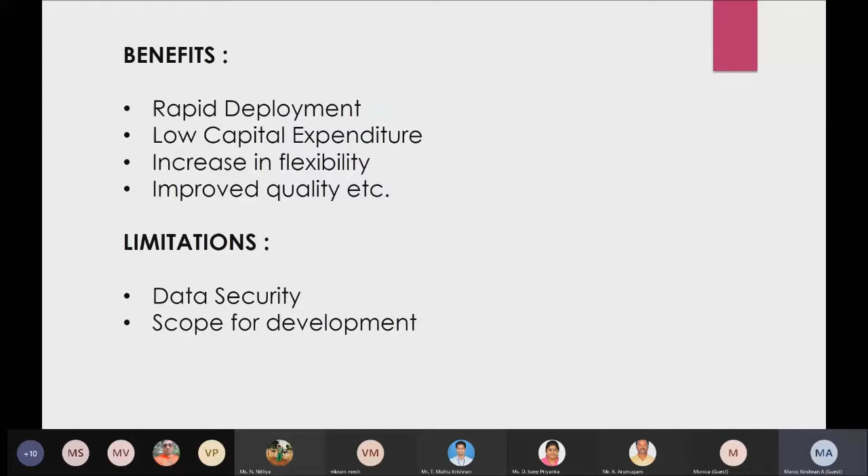That is one of the major limitations. There is also a lot of scope for development - we need to recreate everything, and we can't still simulate all the AGVs and everything within digital manufacturing itself. So there is a lot of scope for development in this field. That is one limitation we are facing right now, which will be sorted out in the near future.

So we'll be completing - instead of doing one project in one year, we can complete nearly four projects per year. So it will also help in saving a lot of time. Thus we conclude this seminar.

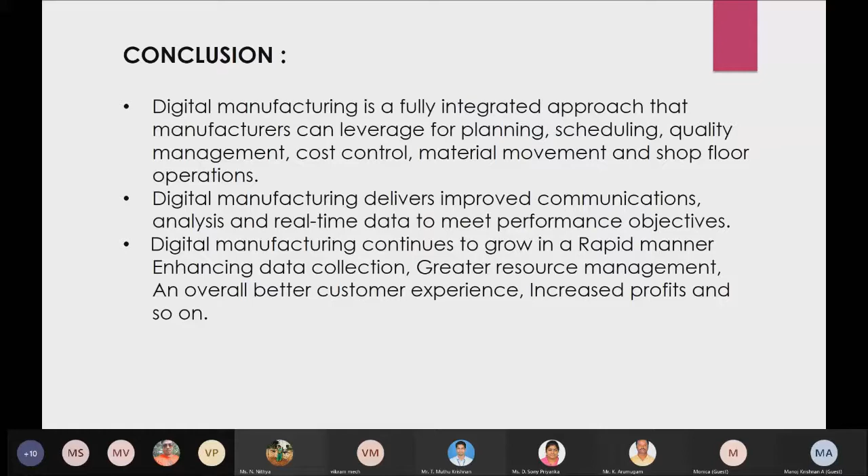Any doubts from the participants? Please.

Sir, can you please switch on your camera, sir? My camera? We will take a snap, sir. Yeah.